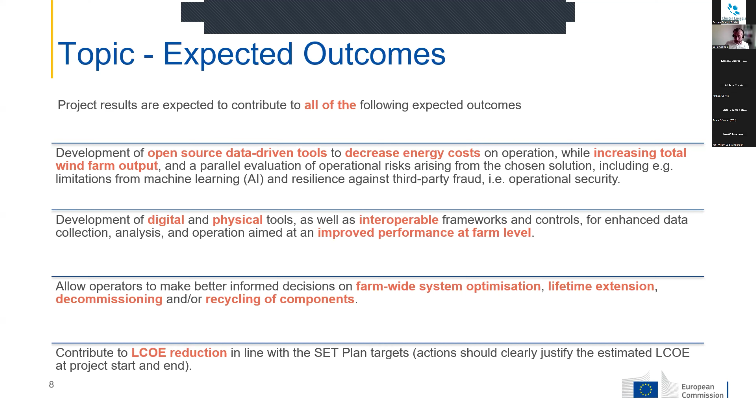The projects were also expected to help the operators make better decisions when it comes to farm-wide system optimization, lifetime extension, decommissioning, and/or recycling of components. And finally, they were all expected to contribute to a reduction in the levelized cost of energy in line with the SET Plan targets. So here what we see is the scope.

Basically, what the proposals were expected to include in order to convince the experts who made the selection, and the European Commission, that they would indeed credibly contribute to the previously mentioned expected outcomes. The first one is that the proposals were all expected to address how their innovation would be able to provide more stable, resilient, secure, reliable, and affordable energy, while considering high levels of cybersecurity. So once again, wind farm output maximization is an important emphasis, and also an encouragement was on reduced component load.

So another thing that we wanted to see in the proposals was how these innovations would reduce operational and maintenance costs and increase energy output, and their solution's impact on component, turbine, and farm lifetime. These tools were expected to be kind of prognostic tools, and as such, these proposals were expected to elaborate on their role in being so regarding failures and damages.

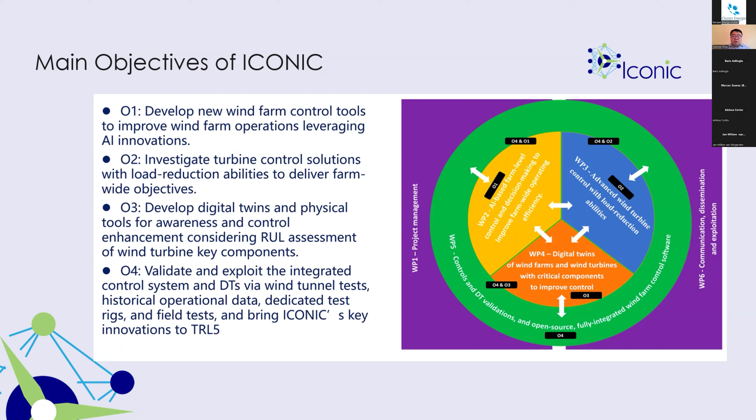Next, I will go through 7 main research highlights of Iconic. The first highlight is the AI-based control-oriented modeling of wind farm wakes. High-fidelity models which can accurately capture the wind turbine wake interactions are computationally expensive, while on the other hand, analytical models which can be evaluated in real time cannot capture detailed flow features. In Iconic, we are developing AI-based wake models which can achieve simulation of high-fidelity flow features similarly to CFD models, while being evaluated in real time similarly to analytical models.

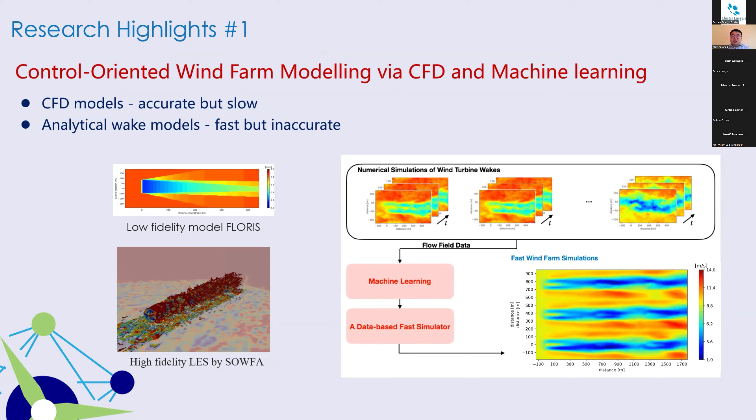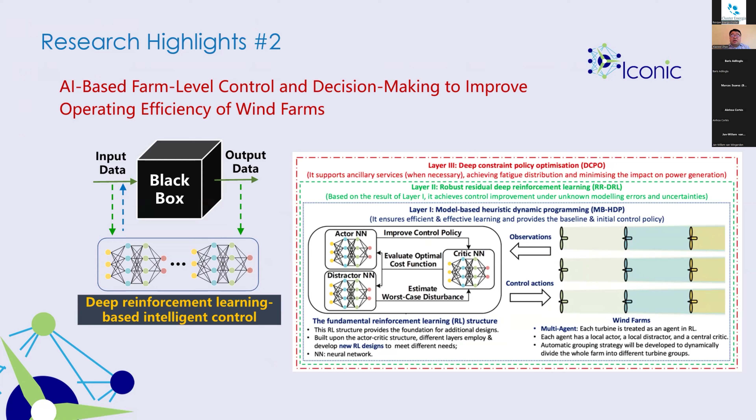The second highlight is the reinforcement learning-based farm-level control approach. In addition to what I mentioned earlier about the control system, we also consider strategies to reduce computational load and introduce a mechanism to enhance cybersecurity.

In recent years, we have focused on developing intelligent wind farm control methods that are trained, tested, and refined via simulators. This allows our reinforcement learning strategy to learn and improve in an environment that mimics real-world conditions.

In Iconic, we are also exploring a new, more data-driven approach in which we use historical data, or offline data, to train our controllers. This method could potentially reduce the need for interactions with wind farm simulators or physical systems.

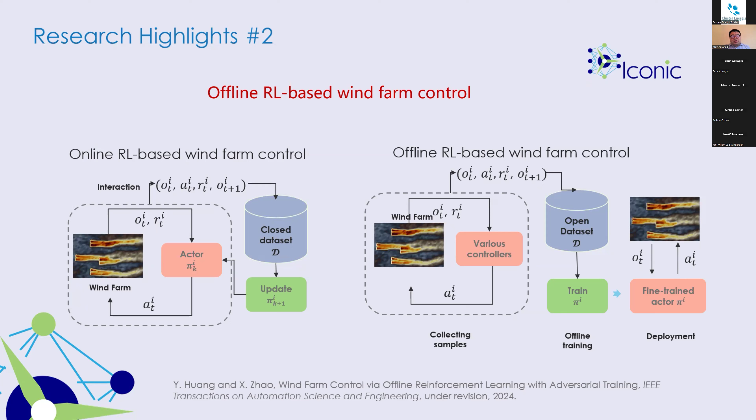Additionally, by using offline data, we can possibly incorporate the experience of the engineer in the control room, so we include humans' experience in the training of our reinforcement learning-based controllers. We call our strategy offline reinforcement learning-based wind farm control.

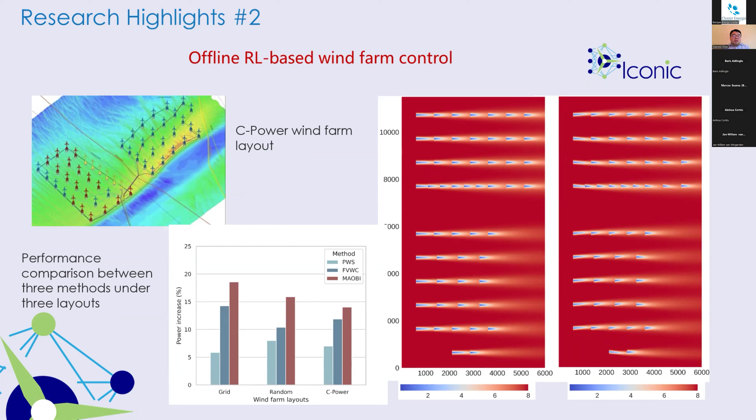We use the C-Power wind farm layout as a simulation test case to test the performance of our offline reinforcement learning controller, which is marked in red in the bar chart. It achieved a 14% increase in power capture compared to the greedy case, and it also outperforms two other non-AI control methods.

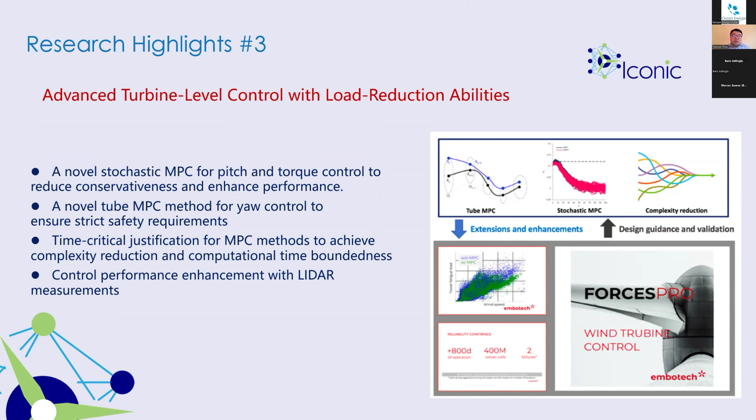The third highlight is a turbine-level control approach. We developed novel MPC approaches to enhance control performance and ensure strict safety requirements. All these proposed MPC methods for wind turbine control will benefit from Embotech's FORCESPRO suite, which is a commercial product for deploying MPC and numerical optimization in wind turbines. This work is ongoing, and we will report results in due course.

The fourth highlight is the farm-level digital twin, which will be developed by a physically-informed deep learning approach. The digital twin can reconstruct the whole flow field in the entire wind farm. This will be achieved by fusing various data and physics simultaneously into the physics-informed neural network structure.

By physics and data fusion, the digital twin will provide wind flow field information that cannot be directly measured by current sensor technologies nor predicted by conventional machine learning approaches.

The captured features include both the flow structure propagation in the wind direction and the wake meandering in the crosswind direction. The next step is to extend this to a three-dimensional case and explore ways to use such rich flow field information for supporting the wind farm control system.

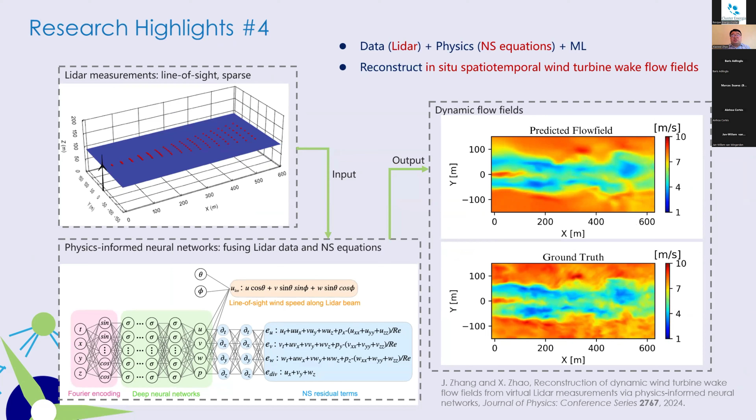The fifth highlight is the turbine level digital twin, including key turbine components. This includes the drivetrain, the generator, the main pitch, and yaw bearings. High fidelity models of these critical components are being developed and calibrated with historical data. Once this is done, a surrogate model will be built based on high fidelity models to achieve real-time performance.

The surrogate models will be deployed based on either a data-based machine learning approach or hybrid approaches, depending on the component characteristics. These surrogate models will be integrated together to form the digital replica of the physical system. Such a digital twin system, along with online sensor measurement, will then be used to support control and management, considering the remaining useful life of the key turbine components.

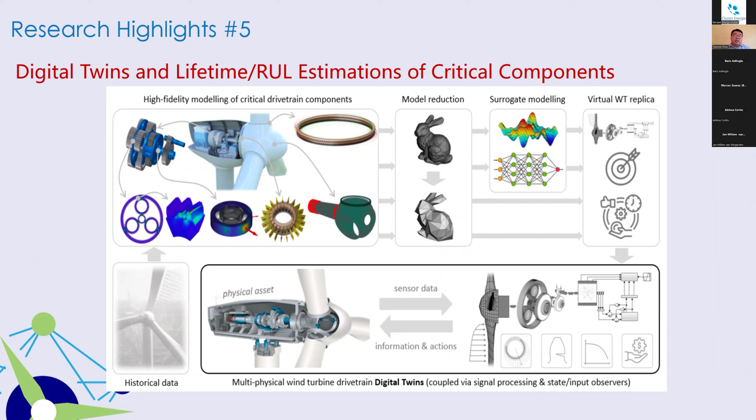The sixth highlight is the extension and adaptation of the developed control and digital innovation towards future 20 megawatt wind turbines. We will also develop a repowering strategy using a 20 megawatt wind turbine for C-Power's wind farm to demonstrate the use of the tools developed within Arconic for repowering and decommissioning scenarios.

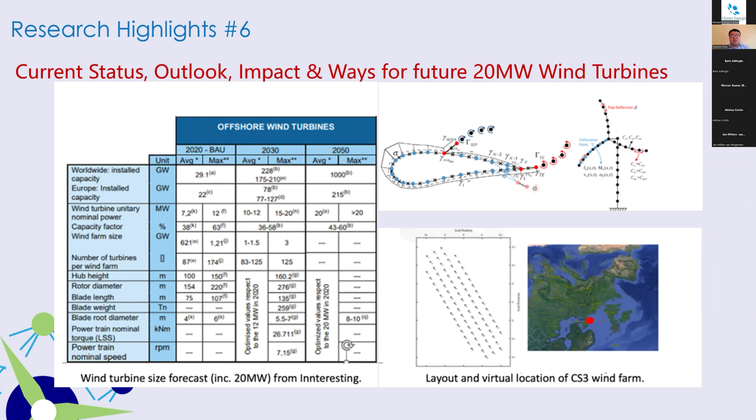The final highlight is comprehensive validations. As mentioned earlier, this includes validation by simulations, historical data, test rig, wind tunnel experiments, and field tests.

At wind farm level, numerical tests will be carried out using large eddy simulation of atmospheric boundary layers and wind farms based on 3 case studies, which cover an onshore case according to one of BP's onshore wind farms, an offshore case according to C-Power's offshore wind farm, and a future wind farm case consisting of 20 megawatt wind turbine design.

All these 3 case studies will be used for evaluation of the digital twin and the control system within the simulation environment. It will ensure that the Arconic innovations are generic to wind farm and turbine specifications, therefore maximizing Arconic's potential impact.

Then validation by physical experiments will take place in the wind tunnel at Imperial College. Extensive turbine array experiments in realistic atmospheric simulation will be carried out, where spatially extended high resolution measurement will be achieved by a combination of the PIV and point velocity measurement.

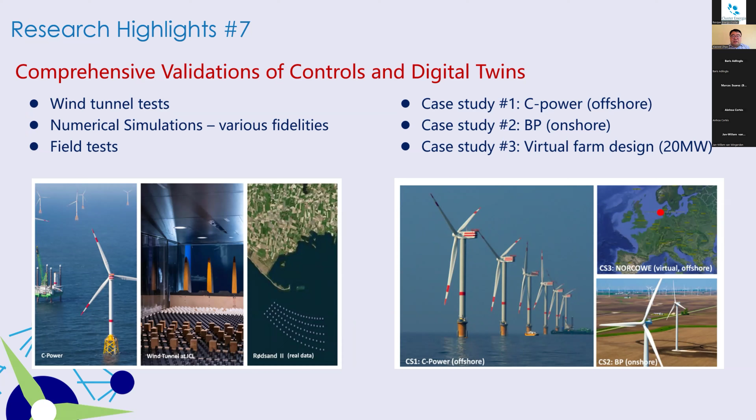So this is the project overview and the update from me. Thank you very much for your attention.

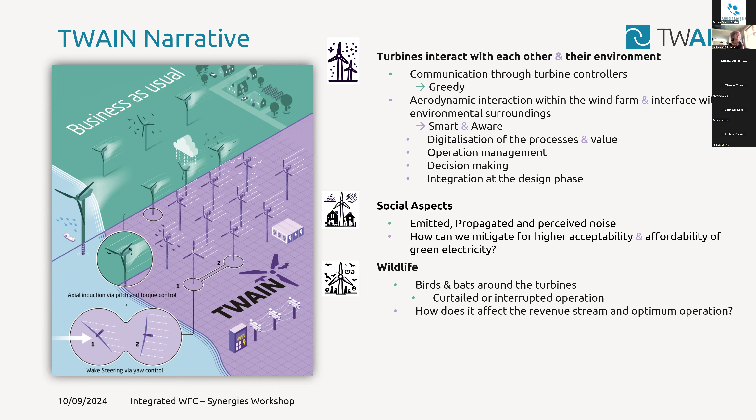And then we're also looking at precipitation and rain. We know one of the most expensive unscheduled maintenance issues around wind turbines is leading edge erosion, driven by rain, especially in Northern Europe, but also hail and different precipitation factors in the weather. We want to take that into account, together with other EU-funded projects, to calculate our O&M costs so we can set up a more realistic revenue stream for our digital twins.

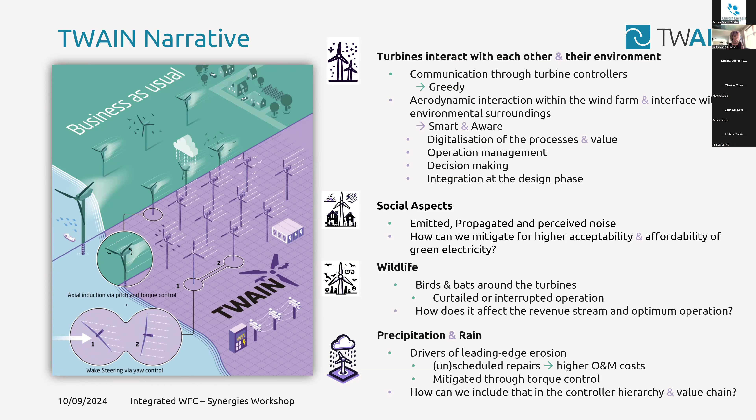Just like any European project, we also have work packages, which we call pillars because they are highly correlated with our objectives. Our very first pillar, the foundation of TWAIN, is basically the data environment - integration of multi-source and multi-format data, how we can integrate them, and how we can ensure they're safe at 3 different levels, which I'll talk about in more detail later. This is our very first work package, and this is also where we started the project.

In work package 2, we take all this data, look at all the measurement sensor information we have regarding the state of the wind farm and its operation, and then start modeling the processes relevant to us. Some are very traditional processes, like the wind farm response itself - power, structural loads. We also look at failure and damage effects, but also grid compliance and services, and as mentioned, some eco-social consciousness aspects.

Then our third work package, which is at the heart of TWAIN, is actually about the value - how we can turn those processes into performance metrics and indexes, defining risk and uncertainties, and how we can come up with societal metrics on top of economic metrics to define a more rounded value for the future regarding wind farm operation.

Our fourth work package, which sits on top of pretty much everything else technically, is about integration of the multi-level controller. So how we make sure there's smooth communication between the turbines within the wind farm, how they communicate with the central farm controller, and how this farm is actually communicating with this wider environment around.

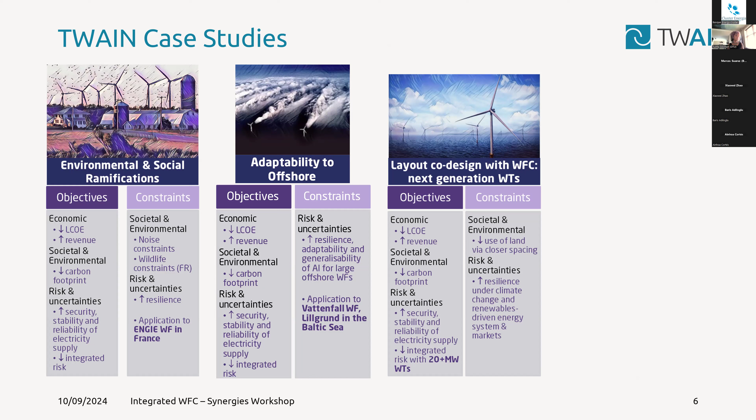So given the site, given the conditions around the site, is it a better idea based on several different metrics, not just economics ideally? Is it a better idea to go for repowering - demolish the existing wind farm, put up newer ones, ideally bigger turbines - or is it a better idea to go for lifetime extension using the control capabilities we have?

So we will also perform some tests, particularly focusing on the power maximization with the load constraints. We will be testing some of those, and we will also see the differences, how it affects power maximization versus income maximization with variable market scenarios.

So our progress so far is mainly about work package 1, which was the data environment, as I said. So over there, our objective was to design a framework to integrate all these different data sources. And of course, it's very important that we ensure the data integrity and we come up with certain standards, because every wind farm, they have different ages, different kinds of data logs, they even have different taxonomy and ontology for their data. So uniforming them is one of our main goals.

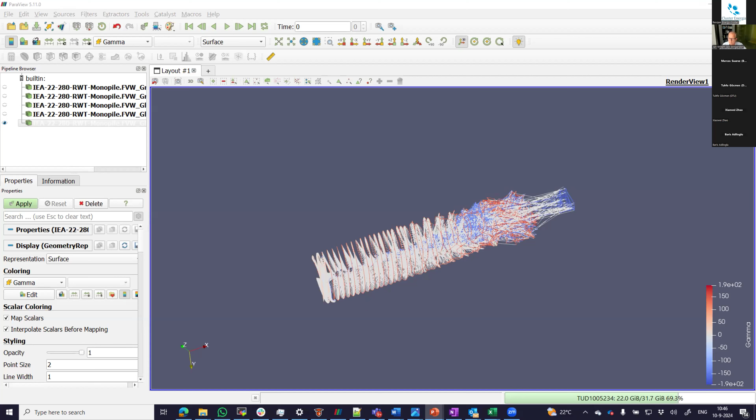Jan, are you there now? There you are. I am. First of all, my apologies, I was disconnected somehow from my docking station. No problem at all. I will share my screen. Share screen. Yes. We see the screen now? Yes. Oh, 1 second, because things now changed. Presentation. Beginning, I have to change this one to this one. So now there you go, see my screen, right? Yeah, perfect.

Good, so yeah, welcome everyone. My name is Jan-Willem van Wingerden. I'm a full professor at the Delft University of Technology in the field of control systems, leading the data-driven control group, typically working on wind farm and turbine control. So this project is in the core of the work that we're doing here in Delft. The SUDOCO project stands for Sustainable, Resilient, Data-Enabled Offshore Wind Farm Control and Co-Design. The data-driven, we have seen that also in the call. A wind farm control, clear. The co-design is something we added in this particular project.

So what I will do is I will try to give you the feeling of the SUDOCO project. And the first thing I would like to show is this overview, because how we see the SUDOCO project is that we build upon previous EU projects and national projects. There has been a lot of work done in the field of wind farm control, but mainly they're working on a single technology like wake steering, induction control, dynamic induction control, and you name it.

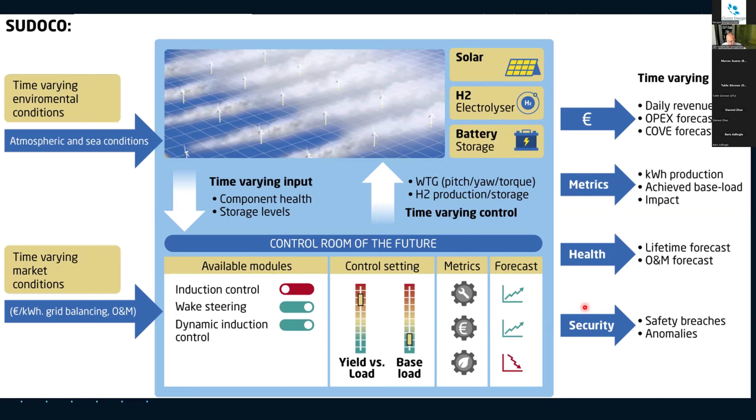So we put everything together in an open source platform tool. And at some point, we also would like to introduce storage, solar, etc., to really have a platform for wind farm operation.

So what we would like to end up with at the end of the project is the control room of the future for offshore wind farms. So that's maximizing a certain objective function and developing an open source data-driven platform that will find a trade-off, for example, between maximizing the energy production and mitigating structural loads, but also other objectives can be added. So that's something we're going to explore.

I will come back to that when I introduce the different work packages. So everything will be integrated in the control room of the future.

And we will test the control room of the future on experimental data, field experiments, and also wind tunnel experiments, and also integrate cybersecurity measures. So at the end, it's integrating a lot of existing technologies and also combining them.

So that's also where the name is coming from, SUDOCO, and you probably know the puzzle. So at the end, the SUDOCO project is basically solving a puzzle, and that's what we're currently trying to do.

So at the start of the project, thanks to Icons, we already have a really nice movie that will introduce again the concept of the SUDOCO project. So let me try to play this movie. Hopefully there's not too much delay, and otherwise we will share the link, it's on YouTube.

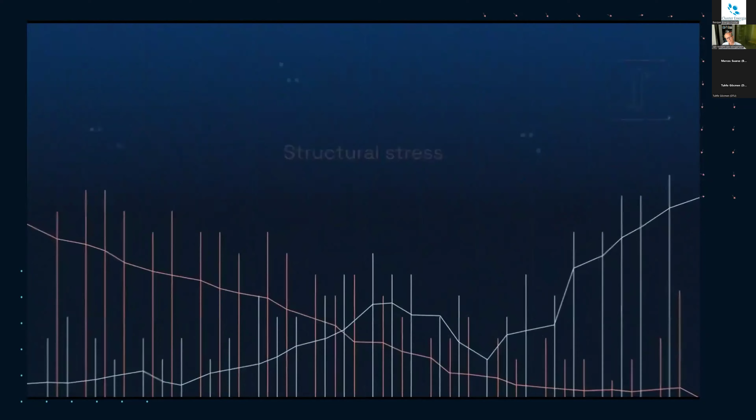This is where the SUDOCO project blows in. With its control room of the future, SUDOCO is set to introduce an innovative open-source data-driven platform designed to achieve an optimal equilibrium between maximizing energy output and mitigating structural stress, especially in offshore wind farms.

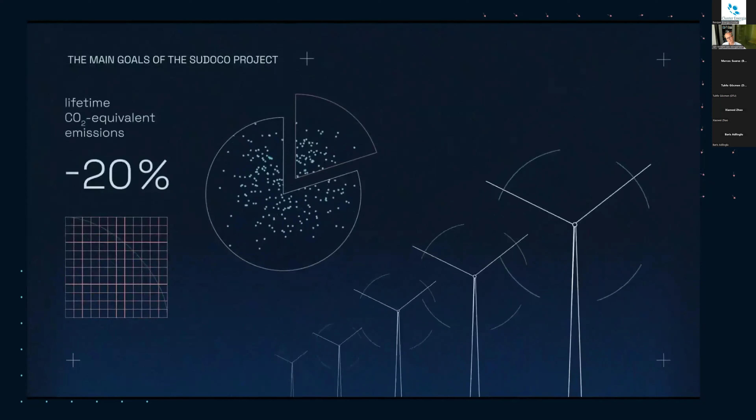The SUDOCO project has 4 main goals: 1. Implement flow control for wind turbines, reducing costs by as much as 10%. 2. Develop a control system for a 10% reduction in the cost of valued energy metric. 3. Optimize the entire wind farm system to decrease lifetime CO2 equivalent emissions by 20%. 4. Enhance cybersecurity to ensure an uninterrupted energy supply.

Follow the flow of the SUDOCO project and its control room of the future. Discover how it can help solve this great puzzle for a greener and more sustainable Europe.

So it's a puzzle, right? It's a puzzle, and what I didn't mention is that the focus of this project is on offshore wind farms. So we have these different work packages, different focus. The first one is flow control.

I already indicated that flow control was part of many European projects where they focused on wake steering, induction control, and all these things. What we will do in this project is integrate the different technologies, because some of these technologies work very well for certain wind directions and wind speeds, and others work better for another configuration. So the focus here is to integrate different wind farm control techniques, and on top of that, to make sure that we can really implement them in the field, looking at scalability and reliability of these control methods. So the focus here is large wind farms, maturing flow control technologies.

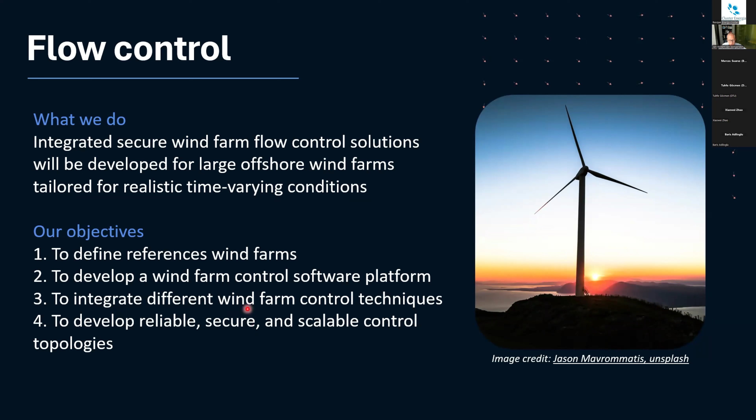Now, if you have the flow control technology, you also have to look at the impact, because if you do flow control, there is also an impact on the structural loading of your turbine. So what we have to do is really understand the impact of wind farm flow control on the loads and the health of these machines. So what we will do is build load surrogate models such that we can also add loads to our objective function when we want to optimize the performance of our wind farm control solution.

That also brings me to the next one, the value function. The value function at the end is what you want to optimize. What we will do in this project is explore different value functions. This can be an economic one, but also an environmental one, and these type of things. For example, if you look at the picture at the right, you see that the spot market price of electricity is higher at low wind speeds than at high wind speeds. So you can imagine you want to make a trade-off here between lifetime and how aggressive your controller will be.

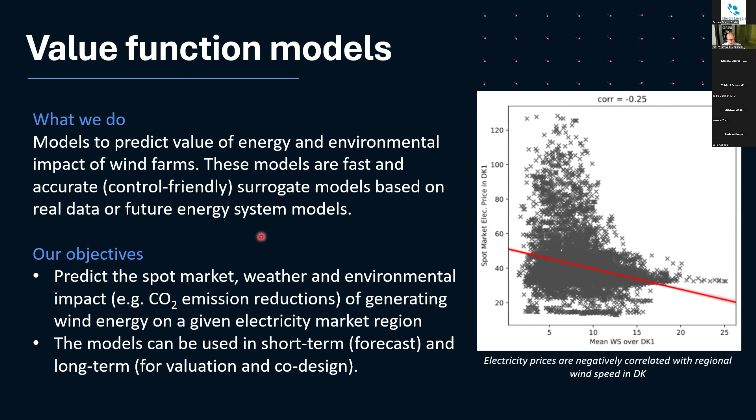So then we have flow control, we have load modeling, we have an objective function, and everything will come together in the control room of the future. This is our open source software platform, where we integrate these different control technologies with a strong focus on cybersecurity, and of course, the data-driven aspect of all the methods that we develop.

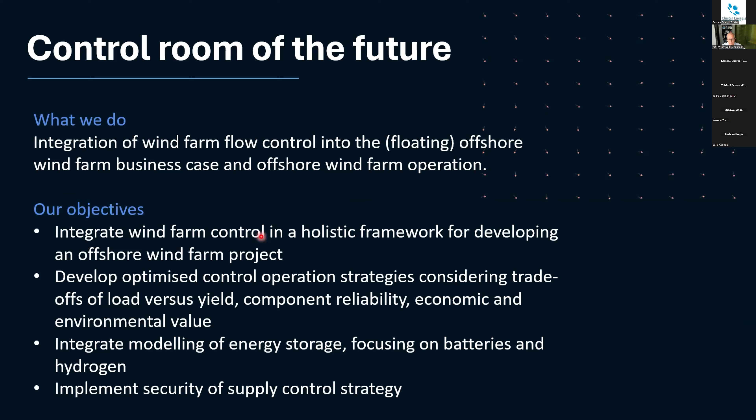Now, the control room of the future is the center of this project, which we will use in the co-design approach. Co-design means that if we have our flow control algorithms, can we, for instance, also optimize the turbine and/or layout of the wind farm. That's what we will do in work package 5.

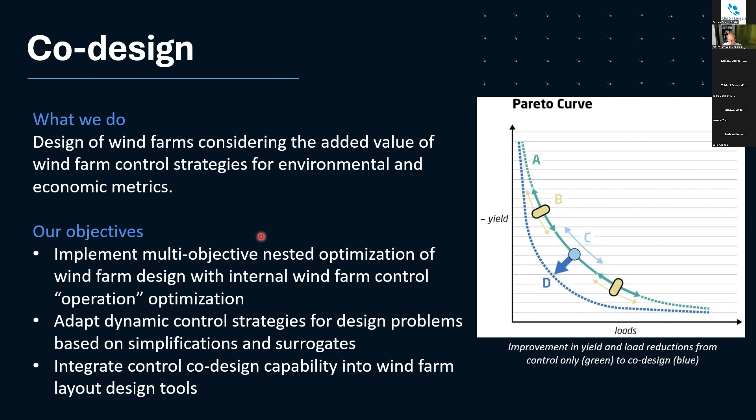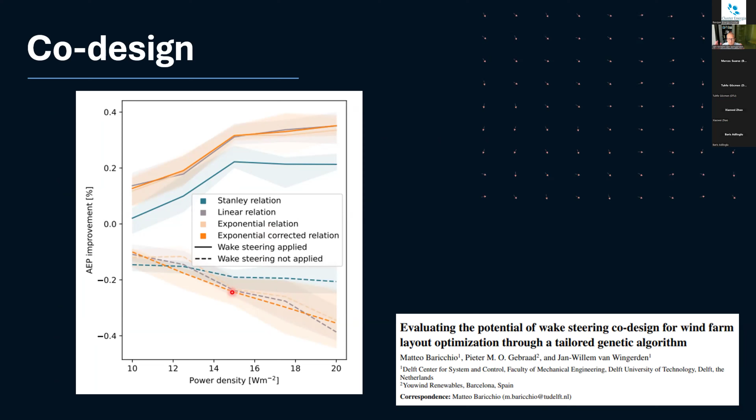The lines that go down say, hey, if you optimize for extra energy and you don't switch on your wind farm controller, then you lose power. So that's also what you see in the same figure. Currently, we are a step further, again exploring the Pareto curve, to basically find a trade-off between loads and increasing the AEP gain.

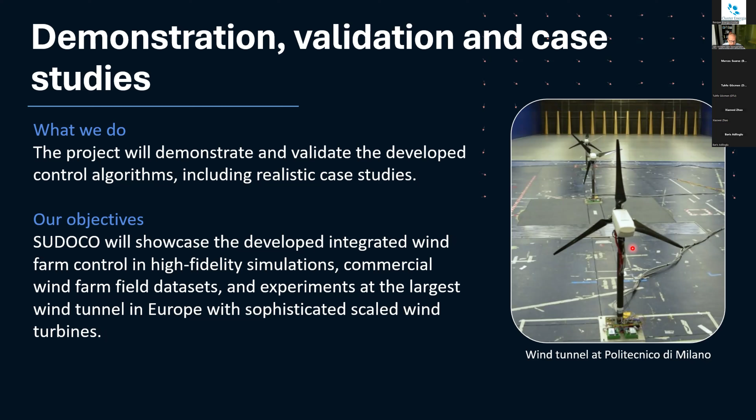What I would like to mention here is that we really build upon the shoulders of others. We build upon previous EU projects like CL-WindCon, FarmConners, Total Control, and also ongoing European projects.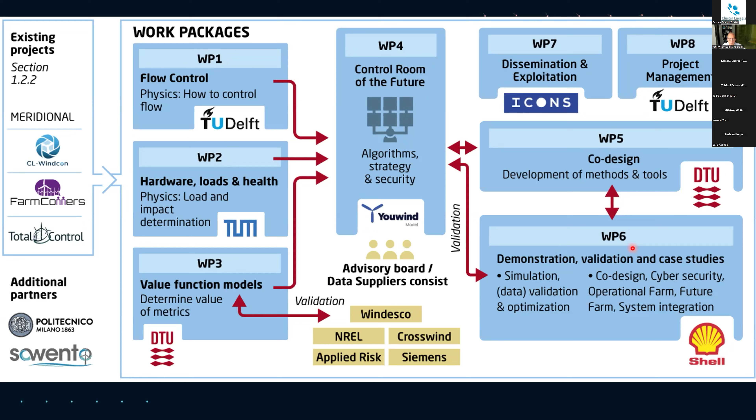What you also see in this overview is the partners involved. We have academic partners like TUM, DTU, Politecnico di Milano, but we also have industry like Youwind Renewables, who are developing the control room of the future, Sowento, an expert in floating wind, and also Shell, responsible for the demonstration. Besides that, we also have an advisory board containing NREL, Applied Risk for the cybersecurity, Siemens Gamesa, Crosswind, the owner of the offshore wind farm in the North Sea, and Windesco, a company in the US working on wind farm control solutions.

So again, these are the partners, as I already mentioned. What I would like to highlight is that we have our SUDOCO website, also with the movie I just presented, and please also look at our LinkedIn account. Thank you all for your attention.

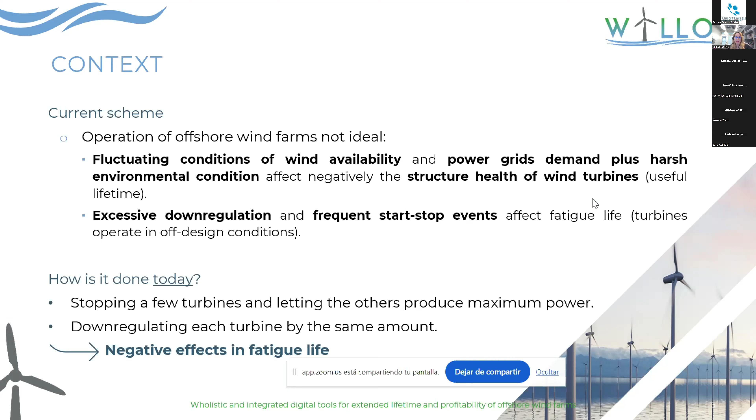Today, different strategies are applied, like stopping a few turbines and letting the others produce maximum power, or down-regulating each turbine by the same amount of energy. These kind of strategies have negative effects on the fatigue life of the wind farm structures.

Then here we have a challenge. This is our problematic, that there is a lack of success in implementing new decision-making schemes. And why is this happening? Because the component degradation and grid integration is particularly complex in offshore. And on top of that, we have additional degradation rates, for example corrosion due to moisture and salinity, or additional loads due to waves, tides, and currents. That's why we propose the WILLOW approach, which is somewhat different from the other projects.

Here we propose an integrated system to provide an open source and data-driven smart curtailment solution. We are focused on this curtailment situation, taking into account the degradation of the wind farm structures. We look for a trade-off between power production and lifetime consumption.

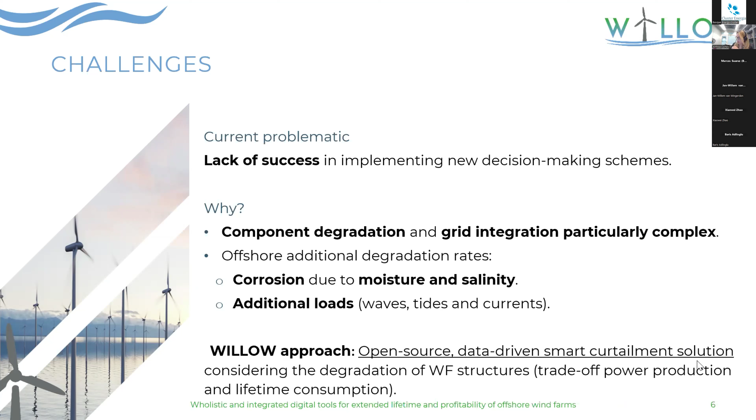To do this, we defined 3 technical specific objectives. The first one is the design of a global structural health monitoring system based on different physical parameters like loads, accelerations, images, thickness losses, etc., taking into account problems like fatigue, pitting corrosion, and coating degradation. The idea is to use or develop physical and virtual sensors combined with machine learning techniques.

The second objective is more focused on the design of prognosis tools, combining SCADA and structural health monitoring data coming from our own system or from other deployed sensors, using physical models and machine learning methods to predict the consumed lifetime and the remaining useful life of the most critical structures of the wind turbine.

And the third objective is to design the decision-making support tool for smart power dispatch in curtailed conditions, as I said, we are focused on that situation, and also to optimize the operational maintenance scheduling of the wind farm.

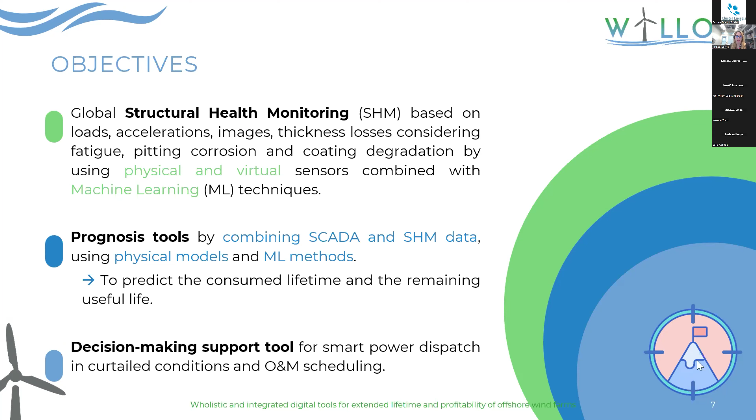Then work package 1 is focused on the definition of the use cases. We can say that we finished with this definition. Our main use case is focused on the Norther offshore wind farm and the curtailment problem.

And here we will use other offshore test environments like Blue Accelerator and HarshLab to get more data for our modelings, and also to validate the sensors or the physical developments of this project, to validate the robustness of the system and to verify if everything works fine in a real environment.

Then currently in this work package, we are working on the definition of cybersecurity strategies at wind farm level, considering also the cybersecurity issues in the monitoring solutions. And also we are working on the development of a system to measure the noise pollution of this offshore wind farm.

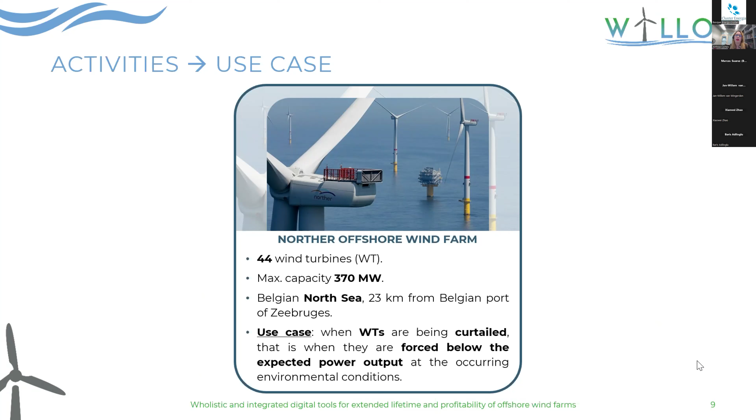For Norther and other operators, the curtailment situation is important, and here the aim of WILLOW is to analyze in depth this curtailment situation and how the high fatigue loads suffering from this situation can in some way be detected and predicted, and to take some mitigation action and do the control accordingly.

These offshore test sites will be used as well, the Blue Accelerator in Belgium and the HarshLab in the Basque Country, to perform some experiments with some of our sensors. As I said, we are working with different technologies in that sense.

We have here two different objectives. The first one is to get even more data for our machine learning methods developed for the different techniques or problems I mentioned. On the other hand, to validate the robustness of the solutions developed in WILLOW, and to confirm that the solutions can work in these real environments, offshore environments.

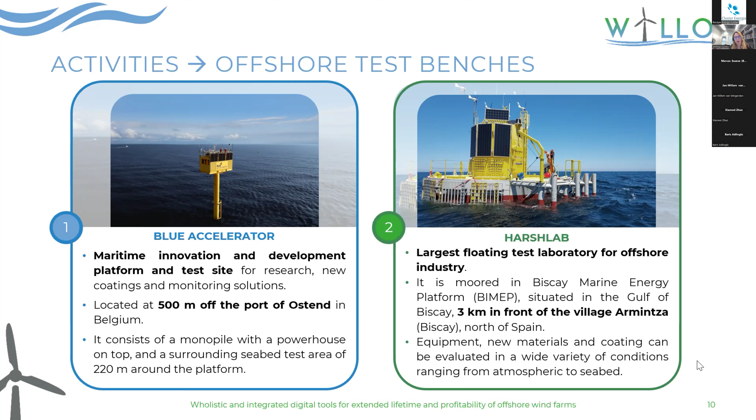We divided into different subgroups related to the topics we are working on in WILLOW, and we received a very good response and a lot of interest from these participants. So we are looking forward to hearing their feedback based on their huge industrial experience.

Just a summary of the outcomes we foresee in this project. As Baris presented in the call, this is aligned with the topic. The first one is the design of open source data-driven tools. The second one, the development of digital and physical tools, to enhance data collection, analysis, and operation, to enable operators to make better informed decisions on things like farm-wide system optimization, lifetime extension, and decommissioning.

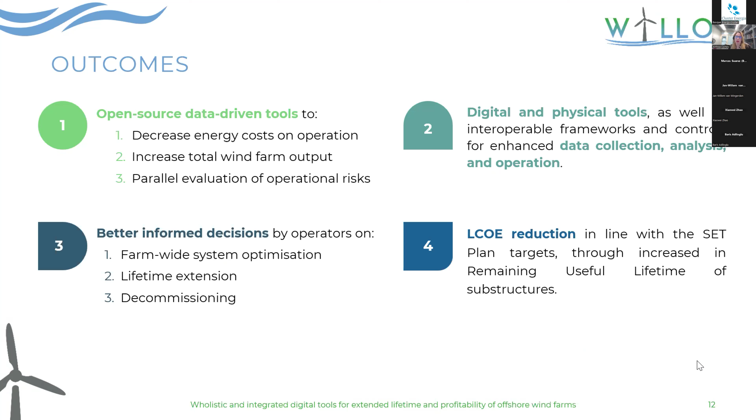The fourth one is all of these projects has this target, which is the reduction of the LCOE. And of course, the expected impacts WILLOW will have in different things like maintenance cost, design and operating life, environmental impact, levelized LCOE. Some numbers of these impacts: for example, we aim to reduce the inspection cost by 50%.

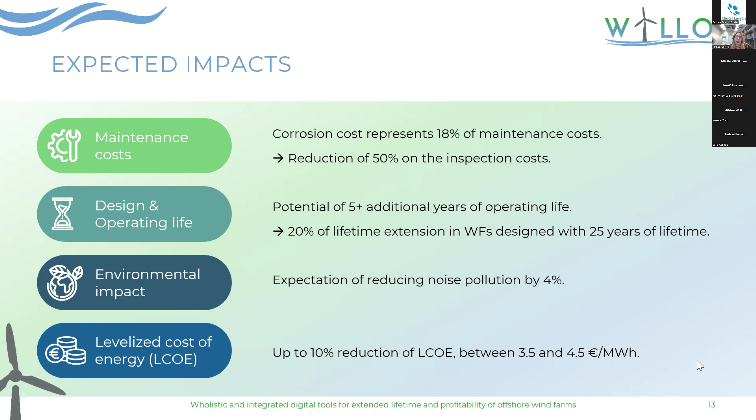We also aim to achieve an increase in lifetime extension, with 5 additional years of operating life of the structures, to reduce noise pollution by 4%, and a reduction of LCOE up to 10%.

And this is all from my side. Thank you very much for your attention, and it was my pleasure to answer your questions.